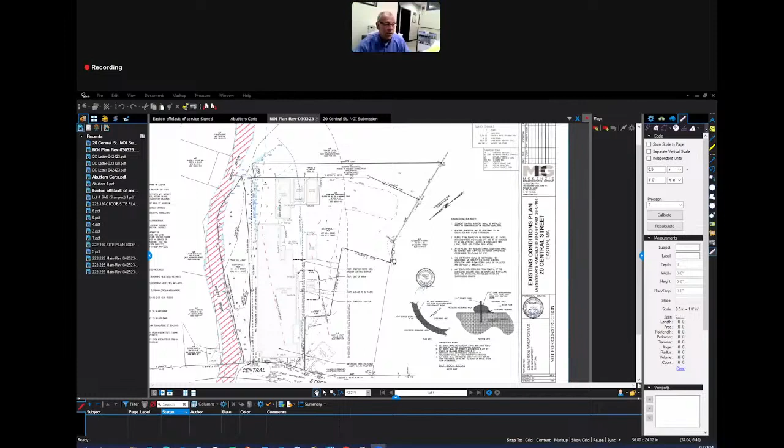So I assume you can all see the screen now. This is 20 Central Street. It's a factory that's been there for, I don't know the exact history, but I'm guessing 100 plus years. It has a main building and several outbuildings, some in the back, one right here.

The building in question is this small building right here. It's in an advanced state of disrepair. The roof has started caving in on it. So for the immediate future, Mr. Vardakostas would like to take this building down and remove it from the site.

So that would just involve probably an excavator with a thumb that would demolish the building, load it into dumpsters to be hauled off site and disposed of properly at a proper landfill facility.

There are, I believe Jennifer took some pictures, there's several 55-gallon drums along here. Chris Vardakostas had someone investigate that. I don't know exactly who, but had someone investigate that. The drums are empty, so there's no pollutants within the drums, so they would be hauled away as well.

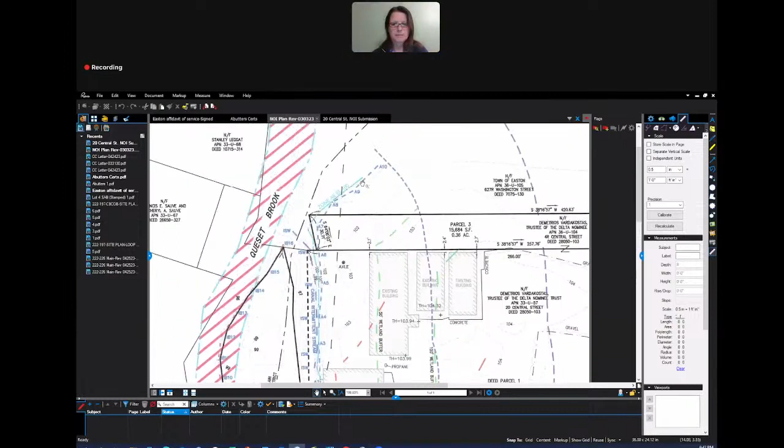The project is not exempt from stormwater management, so we still need the checklist. Most of it you're going to put N/A, but we do still need it.

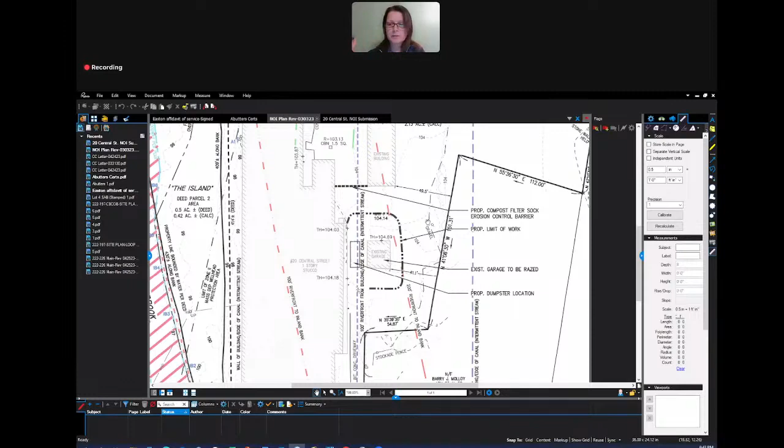Was that a comment you got from DEP too, or no? Might not be, I don't recall what it said. I did get the email, I can look that up. And you made some changes to the operation and maintenance plan? Yes, I did. Okay, I need to get that to you as well.

Those are relatively minor edits. We can make them at your suggestion, I'll certainly do that.

Under stormwater management in the checklist, we mentioned illicit discharge. I know you provided a statement, but it's not really in accordance with the handbook, so that was on the staff report to address, please. Yes, and I saw that.

We're somewhat limited as to what we can investigate on the site. The building isn't accessible right now, so in terms of doing a complete illicit discharge statement, it's somewhat difficult for us at this point in terms of assessing every pipe coming from every location.

There are some obvious ones. For instance, the catch basin here should be easily traceable. But I suspect there are probably going to be some floor drains or whatever inside the building that we would need to investigate as part of that.

It's really kind of outside our realm. Normally we would do this in conjunction with drainage and how we anticipate it—say we were proposing a stormwater basin or something of that nature, we would be able to ascertain and ensure that none of the activity we're proposing is going to impact that.

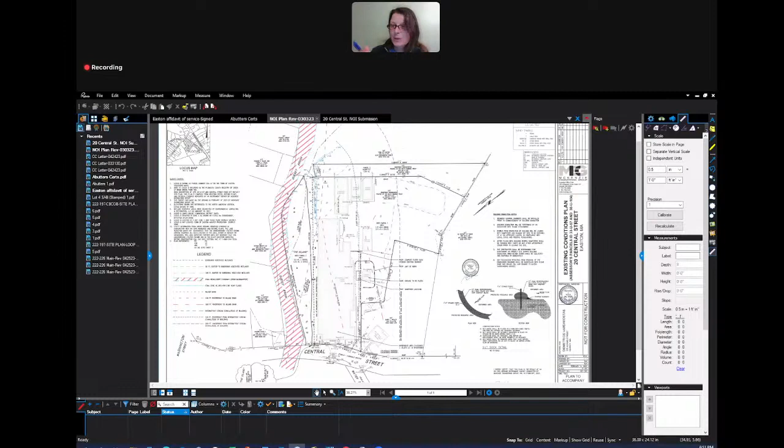How do you want to proceed with that? Would you like it just to be cleaned up? Do you want us to file something, or... Well, why don't we move on to the commission's questions and see what they might have for that, and we can come up with a plan toward the end. All right.

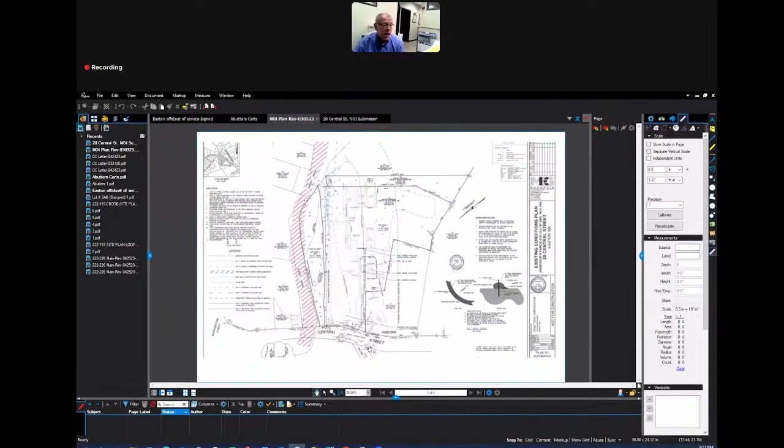So, from my perspective, what's the method of access to this building and the dumpster and everything else? So there's a narrow driveway that comes in off of Central Street, right through here.

So I show a dumpster location here, between the building to be torn down and the existing building. So the excavator would set up in here. They would leave a dumpster. Typically when they demolish a building, I'm sure you've all seen it, but they basically take an excavator and crunch the building down and get it into small pieces so it fits into the dumpster easier, more compactly.

So they would stage a dumpster here and load from an excavator into the dumpster, and then it would be hauled away, and probably, I'm anticipating this might take two dumpsters. So they would haul one away and probably leave an empty one at the same time, and then fill that and haul it away. So it could all take place in a relatively small area.

I would guess that a truck would pull in and then back into here and leave the dumpster, and then do a similar routine to make the exchange of the dumpsters. So it could all be a pretty confined amount of work with that, with respect to this razing of the building.

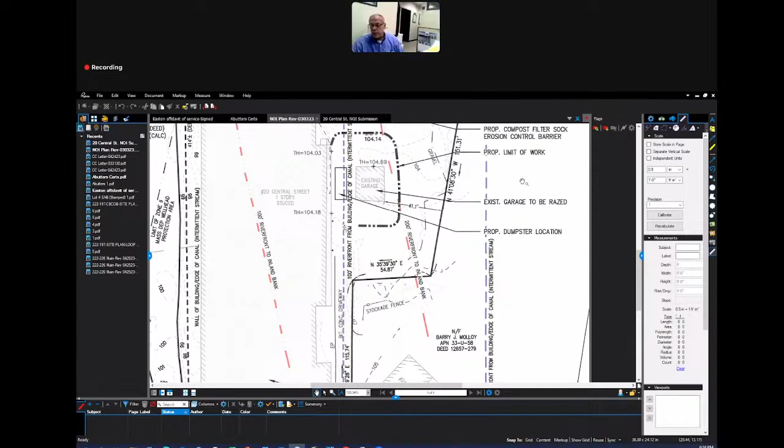I certainly understand the position of the commission. We could propose cleanup of the material, certainly the debris, the roofing materials or whatever else is around the building, especially around the back here - I think that's maybe where you saw all that debris, Jennifer. I'm not sure, but we could propose that cleanup. I don't know how you as the commission would like to proceed. Should that be part of this filing? Should we make a separate filing?

So here's the conundrum that we have as commission members - if we make it part of this filing or any other filing, that leaves it up to the landowner to do the project. And unless we go straight to enforcement, we lose some of the control over the time frame and the definitiveness of actually getting the project done. Right? Because a permit is actually that - it's a permit to do work, not a mandate to do it.

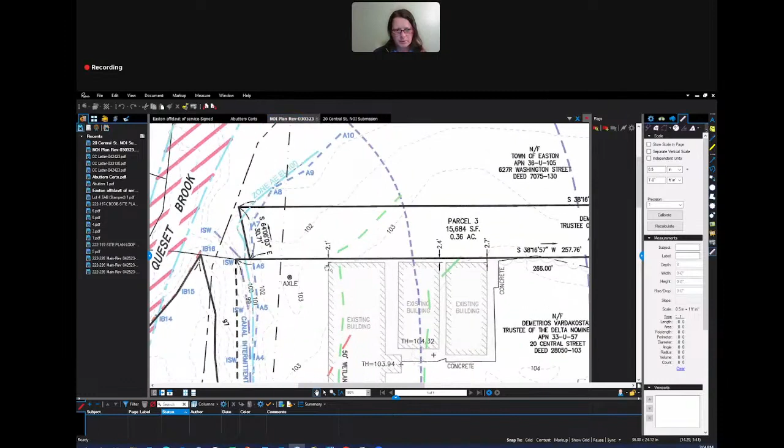It's possible that they wouldn't. There is some vegetation in that area behind the building and between the wetland A series. There is some existing vegetation. It probably would be a whole lot easier to do being on site.

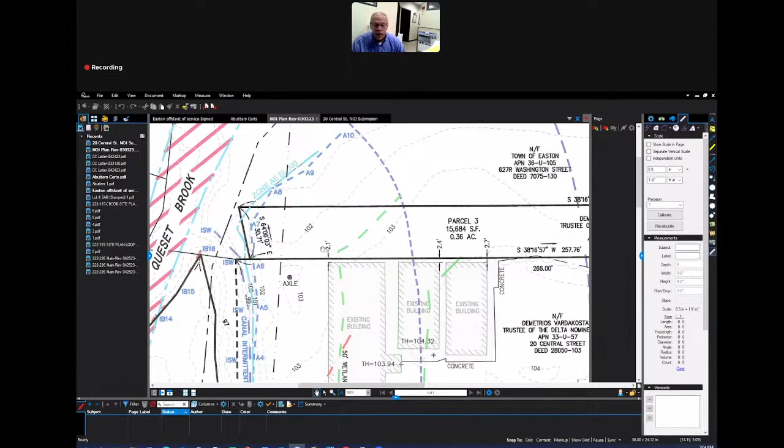And Al, you may want time to discuss this with your client first. And maybe it's worth doing a site inspection with the three of us to try to get a handle on it, because I was going to ask the question procedurally — we don't want to go in there and make a bigger mess cleaning it up by running equipment back and forth. So I think a site visit would be extremely valuable.

Okay, so we have some information that we're waiting for in the meantime, so it would make sense to continue and do the site inspection and pull the rest of the information together, if that works for you and your client.

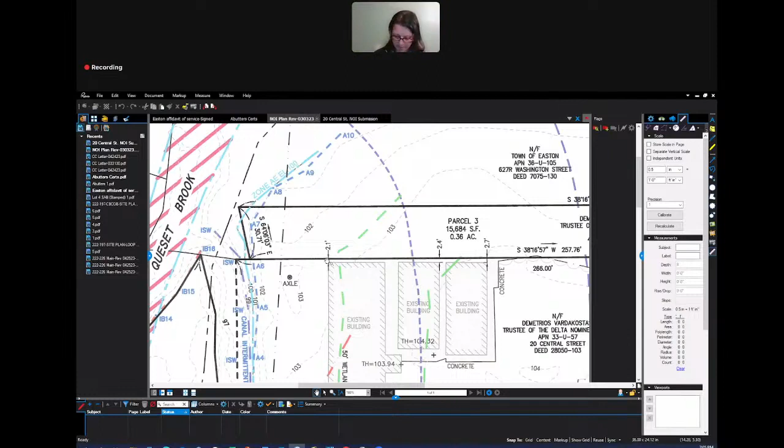It does. I just want to do a little straw poll here to make sure we agree, so we can give Jennifer the proper guidance, so that when she's out on a site visit with them she's getting the information she needs to get this to a decision. So I think we're suggesting let's try and get the debris off the site the best we possibly can. There may be parts of it that may have to be included in a restoration portion of this, but if the debris can get removed

expeditiously and without further damaging the resource area, I think we should try to get that done. So our idea would be to include that in this permitting process, give them permission to do that, and Jennifer can decide what kind of sedimentation control might be necessary. Then we can wrap this permit up as one, and start talking about getting the other violation addressed. That's the way I think we approach this.

Jennifer, does that direction seem okay for you? Yep, I think that makes sense. Anybody else? We're good, we got a thumbs up, a nod. Yep, we've got two nods and two thumbs up.

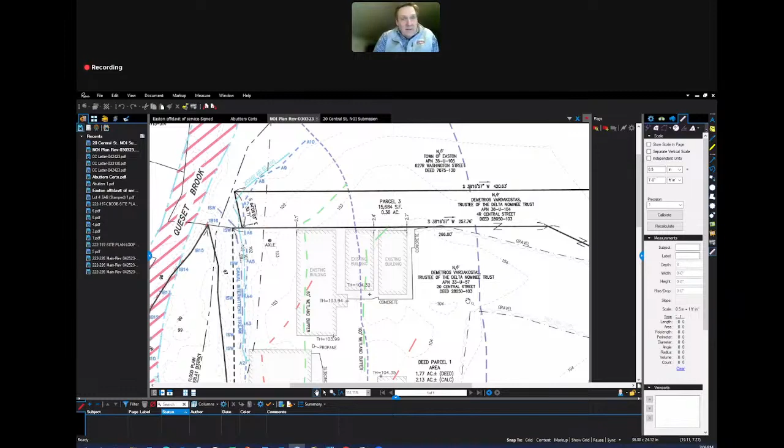Okay, so I think that's the way we go. We'll continue this until May 8th. Just saying, before I do that, any public comment for 20 Central Street? You need to raise your hand or put something in the chat or anything along those lines. Okay, seeing none, let's continue this to May 8th.

And in the meantime, I think Mr. Loomis has some stormwater checklists and an updated O&M plan, and then we got to get some sort of agreement on an illicit discharge statement of some sort. And then we'll do a site visit with Jennifer along with Mr. Vardakostas and see if we can't figure out in the field what can and can't be done. Okay, thank you very much, Jennifer.

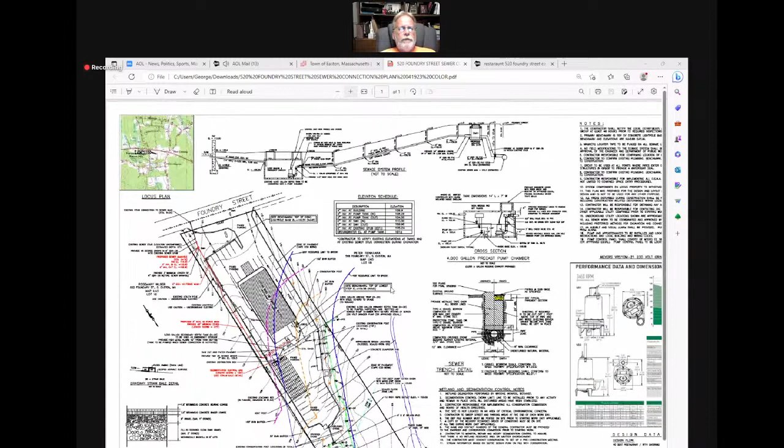At this point, I'm going to go over this project, the RDA that's before you this evening. I'm going to zoom in a little bit more. So basically, there's a stream over here. There's a flood zone A right here without an assigned elevation.

There's a bordering vegetated wetland shown in green along here. This right here is a stormwater management basin. The 50-foot buffer zone is shown in orange. The 100-foot buffer zone is shown in magenta. This is the 100-foot inner riparian zone resource limit, and this is the 200-foot outer riparian zone resource limit.

So now that I've gone through that, I'm going to zoom in a little bit more. Basically what we're doing is, I have erosion control proposed downhill of the proposed work. We're converting the 4,000 gallon concrete septic tank into a pump chamber, and we are going to keep the... this red line here is a 2-inch force main that's going to pump up the hill to a proposed sewer manhole that will gravity feed into the municipal sewer out in the street.

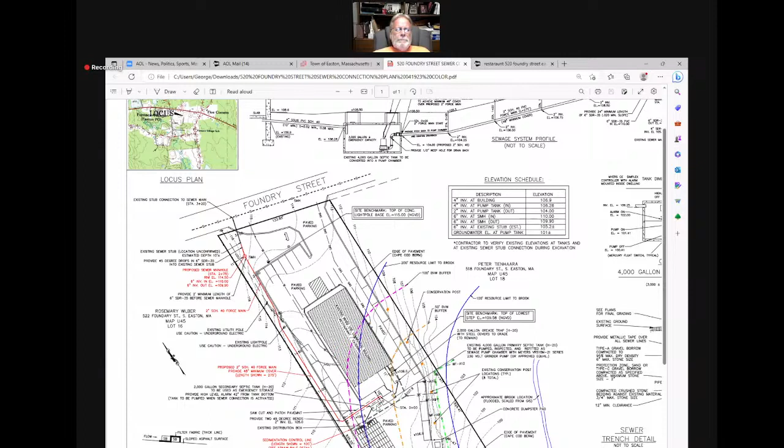Jennifer, any comments on this aspect?

Just a couple things. So all along most of the wetland boundary, there are piles of compost and trash that are partially in the wetland and some at the edge of the wetland, that all need to be cleaned up. And there's a broken pipe that's discharging from the building into the wetland, near WFA 11 and 10.

So it's not some mystery pipe, just so the commission knows, it's relatively clean roof runoff, from the downspouts.

I apologize to Jen already. My plan was to submit the request for certificate of compliance and the request for determination of applicability at the same time. My 77-year-old, really good general manager, she got everything submitted for the request for certificate of compliance before I even knew it had happened. She sent in just a very generic letter saying everything was in compliance, but I meant to add some language to that. Because of the circumstances where Mr. Levine and his partners were not aware of any of this, we basically wanted to start the conversation and figure out what we need to do to close out the old project.

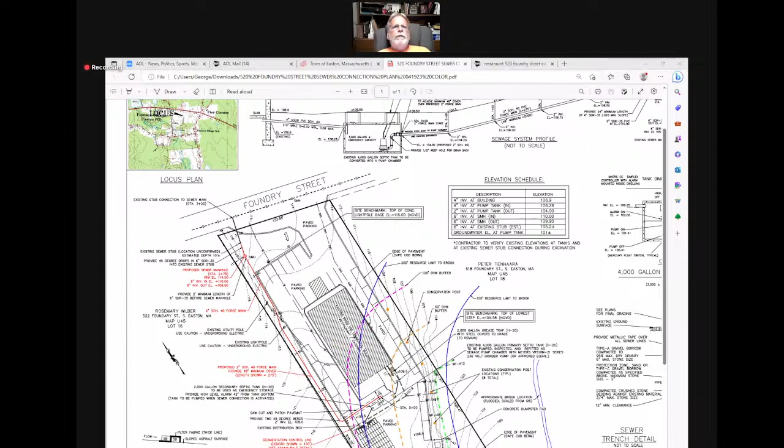Okay, if you want. I don't know if, I think I have to, I wanted to bring up my letter. See, where are we here?

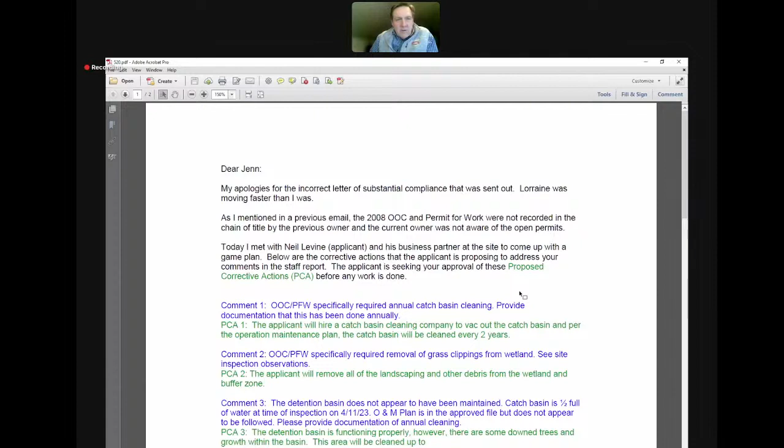Mr. Chair, can I just have a point of information? Jennifer, can you clarify, do we actually have to deal with the certificate of compliance before we issue this permit, or can we have two permits open at the same time? DEP has a policy where you don't have two permits open at the same time.

It's a policy, but ultimately Mr. Levine was not very happy to find out he had all these outstanding obligations. He also owns McGuire's Bar and Grill, and this is the La Familia restaurant, also the strip mall at McGuire's and pieces of property across the street from it. So he's a local businessman who really wants to resolve everything and aggressively stay on top of this. Again, he didn't know anything about any of this until about a month ago.

So George, can I jump in? Sure, you guys hear me? Yeah. This is Neil Levine, I own McGuire's, for those that don't know. My partners own the plaza across the street.

I just want to let you know our intentions. We purchased this property in 2014 at a foreclosure auction. We weren't aware of the order of conditions that were in place. When the septic system started to have issues and we wanted to connect the sewer, as Mr. Collins noted, we were made aware of this order of conditions.

Myself, my partners, everybody involved, we're all local businessmen. We have a long-term history in the town. We are committed to satisfying the requirements that go along with that order of conditions, or any other recommendations that the commission would offer.

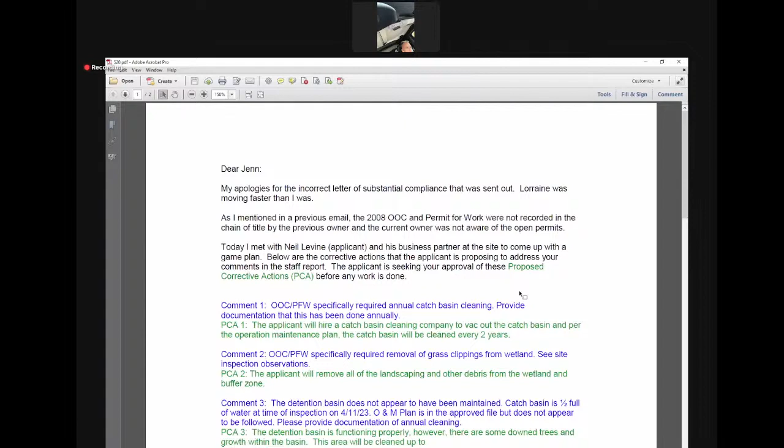Then I'll just add that they have proposed solutions to all of the issues. So George, will just take you through them, kind of quickly.

Sure. Again, this is literally just a copy and paste system, made into a PDF, what I sent to Jen the other day. Again, my apologies for the incorrect letter of substantial compliance, Lorraine was moving faster than I was.

As I mentioned in the previous email, the 2008 order of conditions and permit for work were not recorded in the chain of title by the previous owner, and the current owner was not aware of the open permits. Little side note, what I do now with all my clients is take control of that process. I take the documents and record them at the registry of deeds to avoid this exact situation.

And then today I met with Neil Levine and his business partner at the site to come up with a game plan for the corrective actions that the applicant is proposing to address your comments in the staff report. The applicant is seeking your approval of these proposed corrective actions.

Comment 1: order of conditions and permit for work specifically require annual catch basin cleaning, provide documentation that this has been done. The applicant will hire a catch basin cleaning company to vac out the catch basin per the operation and maintenance plan. The catch basin will be cleaned every 2 years, that's what was in the operation and maintenance plan that was proposed originally.

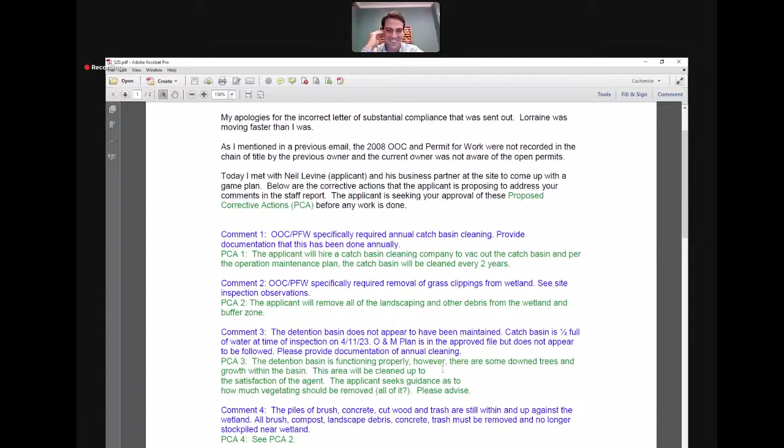The comment for the piles of brush, concrete, cut wood and trash still within and up against the wetland: all brush, compost, landscape debris, concrete and trash must be removed and no longer stockpiled near the wetland. I reference proposed corrective action item number 2.

Comment 5: parking appears to have been expanded into gravel areas close to the wetland. This is not on the approved plan and would have stormwater requirements as redevelopment. It appears that some crushed stone may have been placed between the parking area and detention basin where the shed used to be by the previous owner.

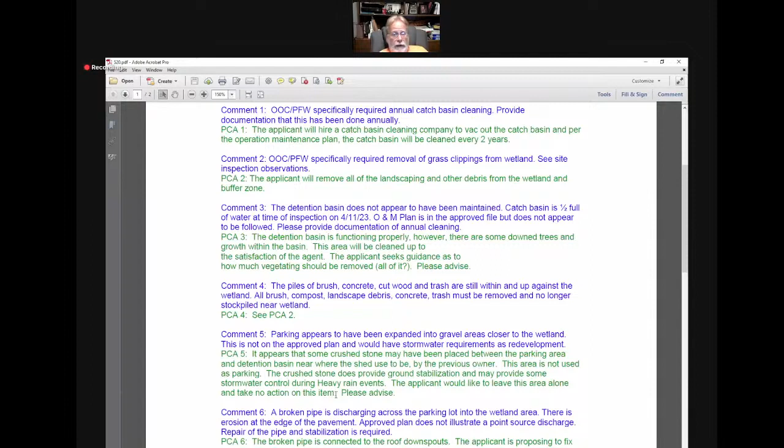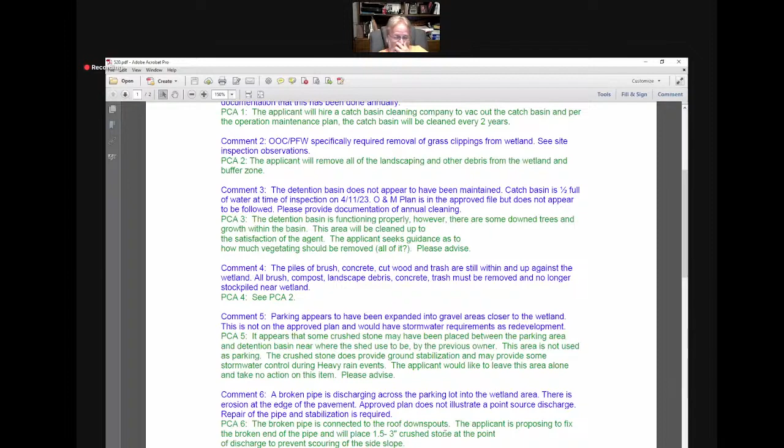This area is not used as parking. The crushed stone does provide ground stabilization and may provide some stormwater control during heavy rain events. The applicant would like to leave this area alone and take no action on this item. Please advise - if the commission or Jen feels strongly otherwise, we're open to suggestion, but basically you have the edge of the parking lot, then a crushed stone area, then the detention basin. There was a shed in there originally, which has been taken out.

A broken pipe is discharging across the parking lot into the wetland. There is erosion at the edge of the pavement. The approved plan does not illustrate a point source discharge. Repair of the pipe and stabilization is required.

My response is that the broken pipe is connected to the roof downspouts. The applicant is proposing to fix the broken end of the pipe and will place inch and a half to 3 inch crushed stone at the point of discharge to prevent scouring of the side slope.

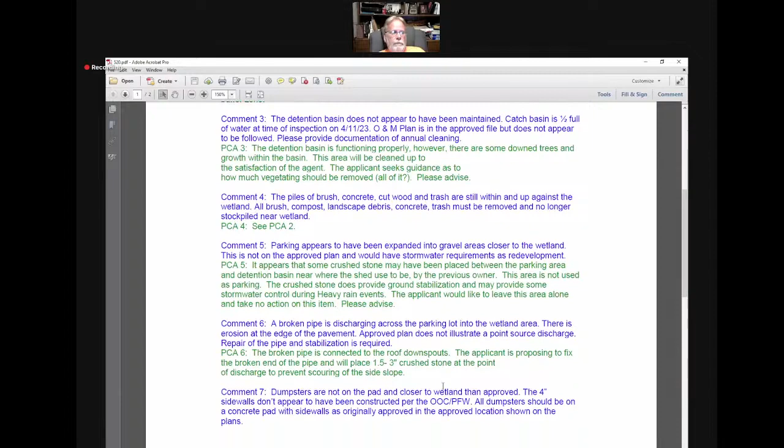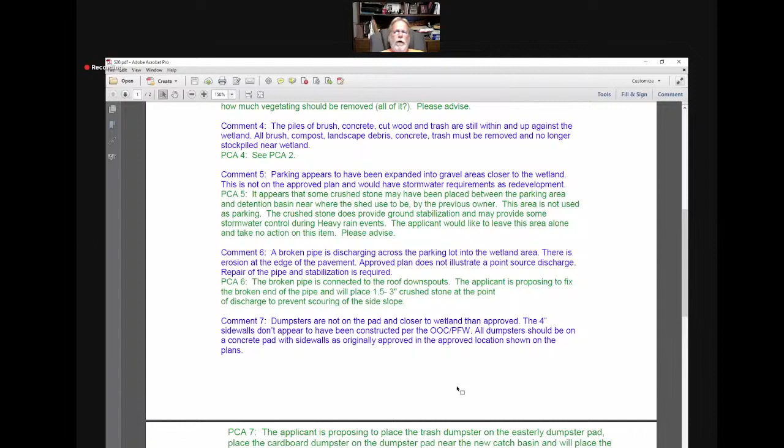Comment 7: dumpsters are not on the pad and are closer to the wetland than approved. The 4-inch sidewalls do not appear to have been constructed per the OOC PFW. All dumpsters should be on a concrete pad with sidewalls as originally approved in the approved location as shown in the plans.

Right now the dumpsters are all clustered together on the left-hand side. Going into the parking lot from the street, there's a cardboard dumpster, a regular dumpster, and a grease dumpster - just so the commission understands how things are laid out right now. The applicant is proposing to place the trash dumpster on the easterly dumpster pad, place the cardboard dumpster on the dumpster pad near the new catch basin, and place the grease dumpster up by the rear of the building.

The applicant is requesting that the 4-inch sidewall requirement be waived. The sidewalls will trap water, creating an insect breeding area. To be honest, it was 15 years ago when we did this design. When we do dumpster pad designs today, we don't do any type of curbing around them - it would be cumbersome and difficult to put in the curbing, and it wouldn't really serve any solid purpose.

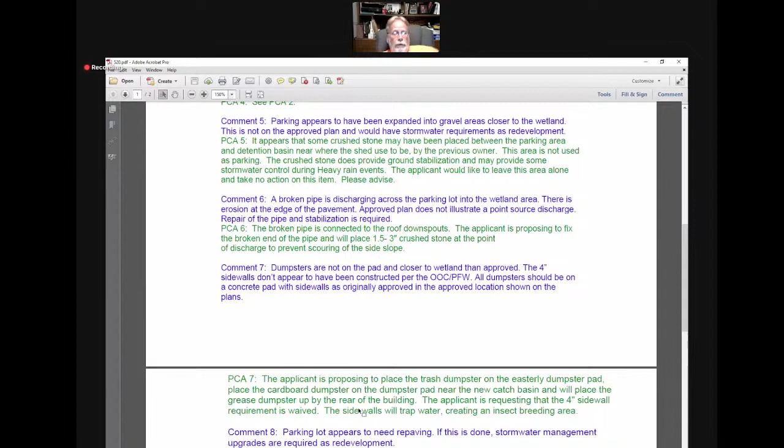My opinion is if we can put them on the 2 concrete dumpster pads that are there - because right now they're off the edge of the parking lot, sitting on the ground - put the dumpster pads basically where they're supposed to be, and then put the grease dumpster right behind the building. Then everything will be on a solid surface, as the original site plan had intended. But we would like to seek relief on that 4-inch sidewall requirement - I don't really see any real benefit to it.

Comment 8: the parking lot appears to need repaving. If this is done, stormwater management upgrades are required as a redevelopment. As of right now, they have no plans to do any paving, but this puts us on notice that if any repaving is done, an application is required.

In closing, please let Mr. Levine and me know if these proposed corrective actions are acceptable. He is committed to rectifying these items to the satisfaction of the commission. Please let me know what your thoughts are, and thank you for your guidance in this matter.

So that's it - we definitely have some work to do. But if we could just get a little clarification on some of these things, on exactly what the expectations of the stormwater handbook, Jen, and the commission might be. If the side slopes and the bottom are supposed to be mowed, then go in and correct that - but I don't think that's the case with this. There wouldn't be trees growing in it otherwise.

Yeah, they're actually kind of growing over it, not growing in it. It's all thickly wooded and they're growing over it. So honestly, if you can walk around the trees and get into the stormwater basin, the bottom of it actually has no debris or anything on it.

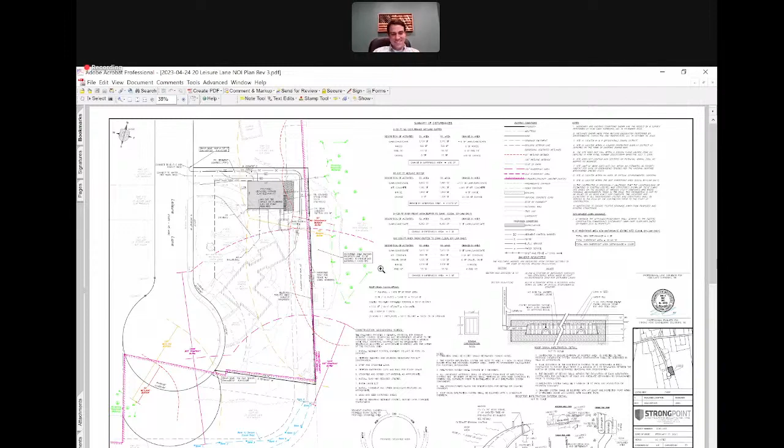Okay, so this goes along with the letter that I submitted today. I'm going to walk through this letter and the plan at the same time and show you guys what we've done here.

First and foremost, we had this issue with an encroachment into the abutting Wilbur's property, which is also natural heritage habitat. We talked about ways to rectify that, including getting the fireplace out of the area over the property line, and we had proposed conservation markers in that location.

The commission, I don't think, was satisfied with the conservation markers, so we beefed it up and we're proposing to put a split rail fence on right now with conservation markers on the fence. That's going to prevent any future encroachment into that area.

Since this is an area that we don't own or control, like we talked about last time, we can't really do a restoration or mitigation planting on it, but we can leave it alone and let it repopulate naturally, which we feel is a betterment.

That's a 4,400 square foot area, as opposed to the size of the garage we're proposing, which is 1,344 square feet. So roughly that comes out to close to 3 times, a little better than 3 times, the area that we're proposing.

Ms. Carlino, I'm just breezing through my letter here. Ms. Carlino had made a note about there being a mulch pile and concrete in the wetland and buffer area. We agreed to take those out.

Now, more importantly than all of that, I'm going to zoom in on the building. The building in the previous form was 44 feet long and was situated in the buffer more, with 93 square feet of the building in the 50-foot no-disturb buffer.

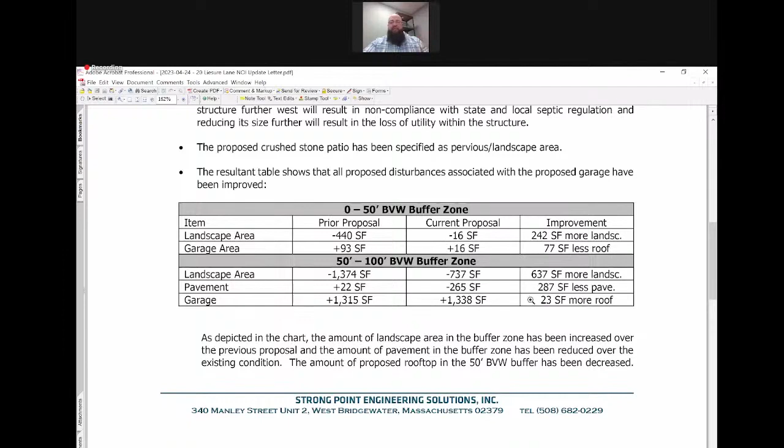And as a trade-off for all of that, we're only proposing 23 square feet more rooftop in the outer 50 to 100-foot buffer.

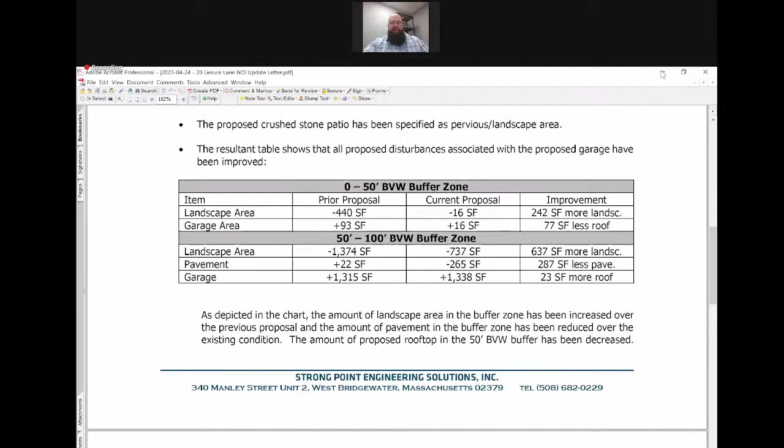Now, what's important to note here, I know we talked about before - I'm going to go back to the plan for a second. In addition to all of that, we have completely wiped out the need for any resource area alteration to do with the riverfront area.

That's gone now. We're also proposing a rooftop infiltration system. That's going to be a betterment in that it's going to take the clean rooftop runoff and get it into the ground directly, where there is otherwise no mechanism on site that does that. We're relying completely on surface infiltration to get water to the ground. This will ensure it gets injected directly into the ground. So all those are betterments.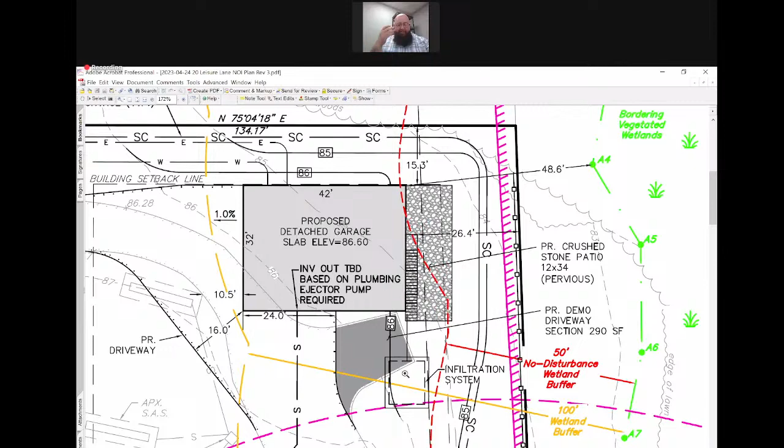In addition to all of that, the last thing in our letter, it was suggested to us by staff that there may be funds that could be contributed to do some work in the town. What was identified is a need to refurbish, repair, or replace some of the conservation area signage, and there may be a need to provide material to improve the community gardens. So my client is proposing to make a donation of funds to either or both of those things, however the commission chooses to split it up. Certainly at your discretion, as part of an additional public benefit to help fund those items. He's proposing a donation in the amount of $2,500.

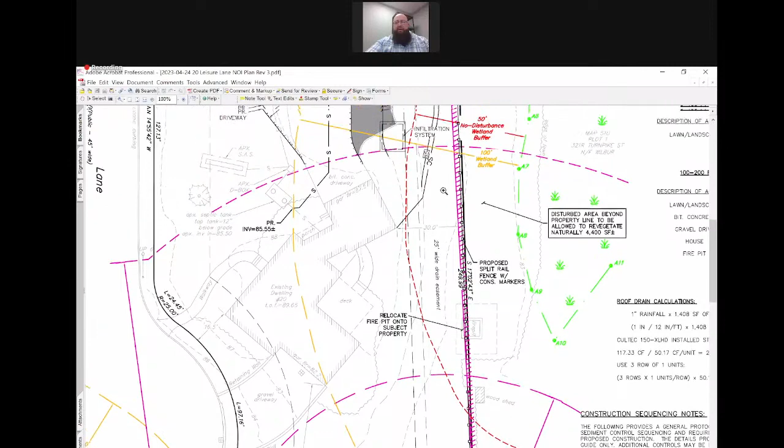We're allowing the remainder of the disturbed area to repopulate. We're putting up a fence to make sure we're not going into that area again. We're going to put up the conservation markers, and a donation for off-site betterments on top of all of that. So that is part of our mitigation strategy. I'm hopeful that the commission will agree that we've made significant improvement and hopefully hit the mark on this one. Mr. Chairman, I'm glad to turn it over to you, and I'll go your direction.

Thank you. Jennifer, any update for us? The only other thing, in addition to what Eric has already said, is they revised the waiver requests. Which we did.

Any comments from the commission? I'd like to know, last time we gave the applicant, Mr. Diaz, direction to move the building out of the no-disturb zone. I think he is now 1.4 feet into the no-disturb zone, and provided an explanation as to why. I certainly think he's done as good an explanation as he possibly can on this. I just wanted to take the temperature of the commission to see if this was an acceptable location for this. There was some discussion previously that it couldn't move out far enough because it would block the house or some other thing, and I think we discounted that. But I think there's probably a proper explanation on the table here to have it inside the no-disturb zone by 1.4 feet. So I don't know, anybody else?

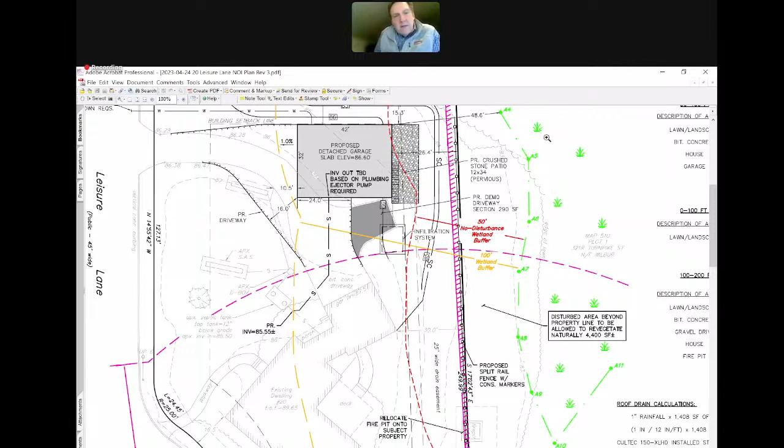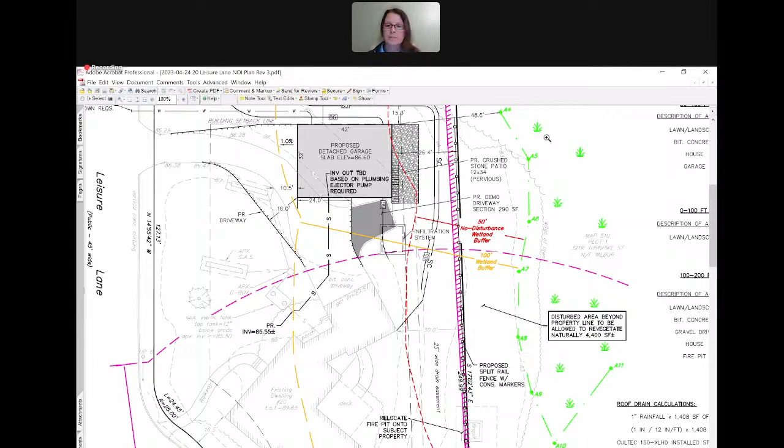Before I go to public comment again, I just want Jennifer to give us some guidance here - are we prepared to move forward? We would need a revised waiver letter if we wanted to move forward with using the decreased pavement and stormwater treatment as public benefit on this one. I'm sure they would get that letter to you, and then the detail of the patio on the plan. Right, that's what I was just about to say, the changes to the plan.

So I just want to make sure you were comfortable with that. Yes. So before I go to public comment, I just want to make sure that if there is public comment on this particular project, that we stay focused in on the actual bylaw resource areas as opposed to a general positive impact of the project. So any public comment for 20 Leisure Lane?

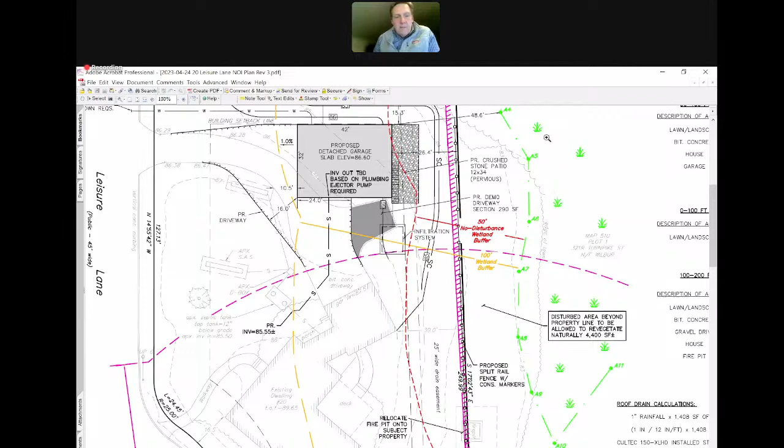Mr. Wilbur, I'll recognize Mr. Wilbur, see if we can. Should be here in a second.